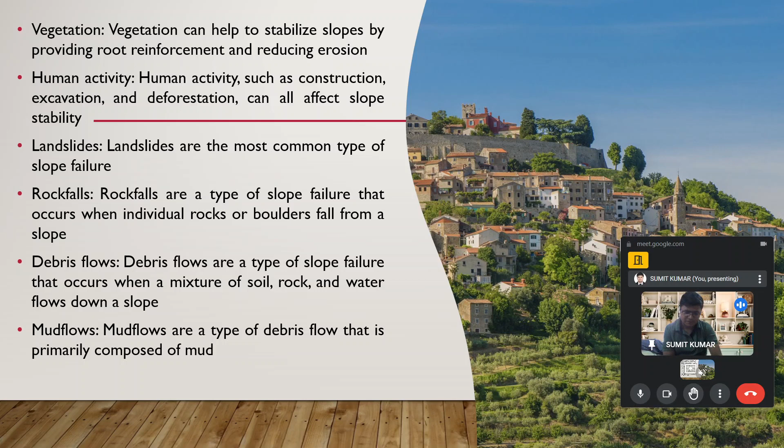Now, some methods used for stability analysis of slopes. First is the limit equilibrium method, which is the most common type of slope stability analysis method. In this method, we try to find the limiting force at which the failure of the slope takes place.

Talking about the finite element method, this is a more sophisticated type of slope stability analysis. In this method, software like Slope/W or other recent commercial softwares are used, in which the slopes are designed and then it's seen that by applying a certain amount of force, what type of failure takes place. In the finite element method, the slopes under study are discretized into small sections, which are studied separately. The analysis is run, and we reach a specific outcome: up to this much force the slope is stable, after which it leads to failure. Finite element analysis is one of the most promising techniques in the present day world, and it has been used widely. It basically replicates the true sense of the slopes which are present there.

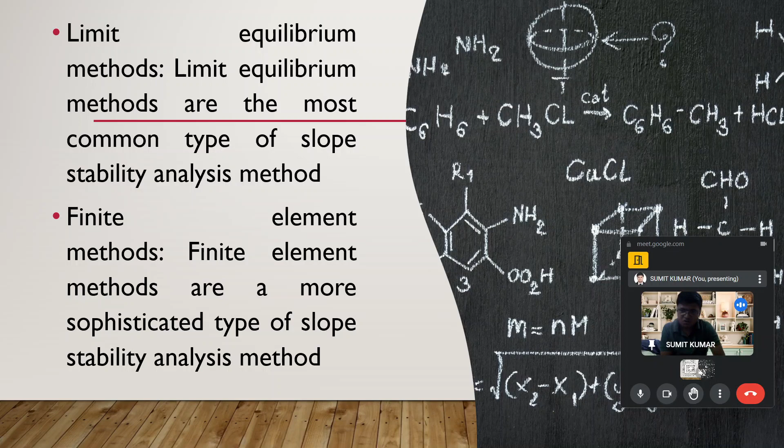Now talking about drainage, as mentioned earlier, drainage is one of the problems.

The drainage can help improve slope stability by reducing the amount of water in the slopes. It needs to be understood that if the drainage is sufficient, then the water, which is a problem for the soil, will not create the problem to a full extent and can reduce the damage at those specific locations.

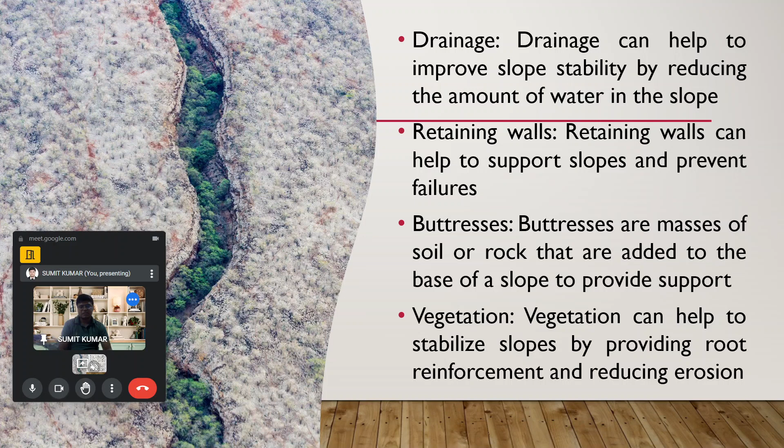Now talking about the retaining wall. Retaining walls can help support the slopes and prevent failures. Buttresses are masses of soil or rock added to the base of the slope to provide support, and they sometimes also act as support to reduce the chances of failure of the slope.

We have discussed vegetation. From vegetation, we concluded that removal of vegetation can disturb the slope in the downward direction and may ultimately lead to damage or instability within the slopes, because one of the prime concerns regarding vegetation is deforestation, which is the primary human-induced reason leading to the failure of slopes.

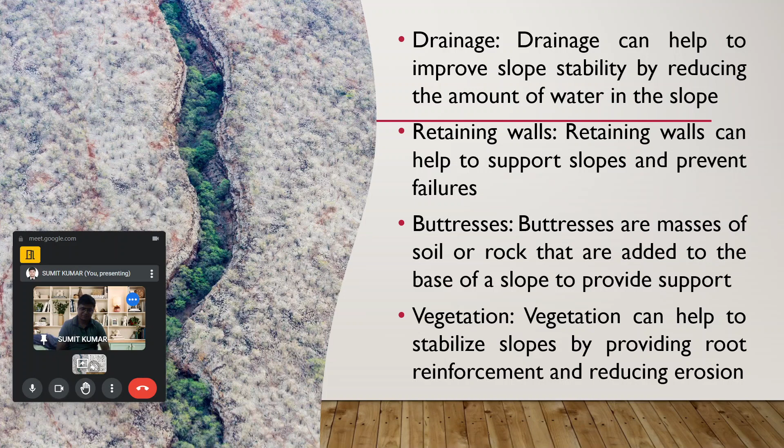We have discussed slope geometry. The shape, size, and angle of the slope are equally important for our understanding, because if the slope geometry is not taken care of and understood, it may lead to problems related to these facts.

Now talking about groundwater. Slope geometry, soils, and rock properties have been clearly mentioned in the previous slides. But understanding groundwater is one of the major concerns, because the presence of groundwater could affect the effective stress parameter and lead to problems associated with those locations.

Talking about vegetation, vegetation growth reduces the chances of erosion in those regions and stabilizes the slope in itself in a way. So the presence of vegetation is also one of the good factors we understood.

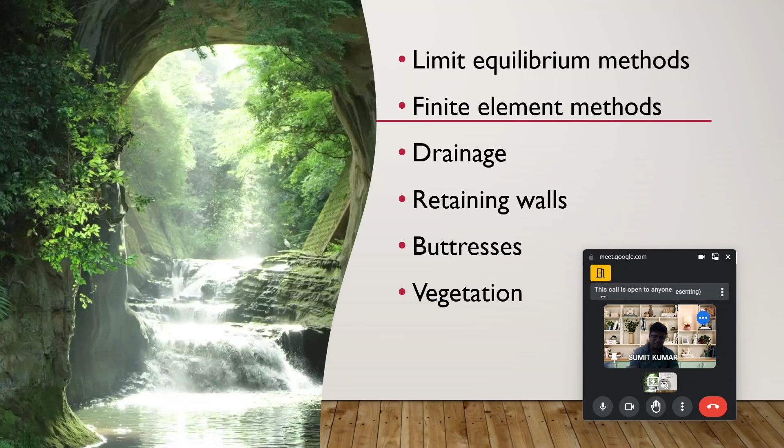The drainage conditions, retaining walls, and buttresses which provide support at that section, and vegetation, and how vegetation could help -- these points we have gone across in a very elaborate way to develop our understanding.

Now we move to the stability of slopes. Here we will check some of the other concerned practical examples which could give broader aspects to our understanding.

Now talking about the stability of slopes. First, the slope definition: we understood very clearly that the slope is that section which may be finite or infinite, present specifically in hilly areas. A large sloping region could also give a balance in a way, but if the slope is not very large, not an infinite slope but a finite slope, the analysis takes place in a different manner. We have discussed about that.

Going forward, we will discuss the methodology as well, how to find the factor of safety, and if we want to achieve a certain factor of safety, how much depth should be there. We will discuss those points, perhaps with the help of some questions, to reach those objective concerns and give a concluding remark regarding the same.

Now, the types of slope we have understood earlier as well. The cause of failure of slope may be natural or man-made. Talking about natural causes, these include failures of slope due to instability, due to seismic effects, or sometimes due to erosion or heavy rainfall, which lead to weakness of soil at those specific locations.

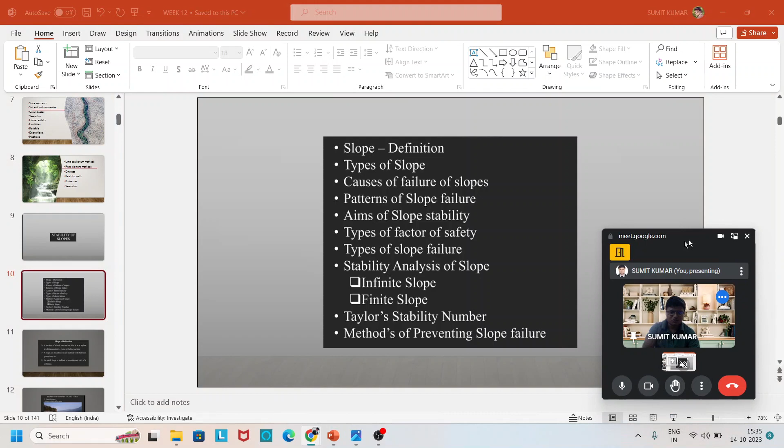Talking about the aim of slope stability, the primary aim is to give safety to the people residing there, or using those locations for day-to-day activity, or for transportation purposes. It needs to be clearly understood that the large economical damage as well as the damage of life, which leads to serious concern, needs to be eradicated. So the primary aim is to reduce those losses.

Talking about the factors, the type of factors of safety. The factor of safety is a study in which one will clearly mention the facts related to failures, and how the eradication of failures could be achieved.

Now talking about stability analysis in slope. There is an infinite slope and a finite slope. Infinite slope is of larger length as compared to finite slope. In infinite slope, we take the analysis at specific sections and then develop our result in finite slope. The finite slope doesn't mean it has a very less or large inclination; this is not associated with the facts related to infinite and finite slope. So in finite slope, we first go through the infinite slope to develop our understanding, and afterward we move to the finite slope.

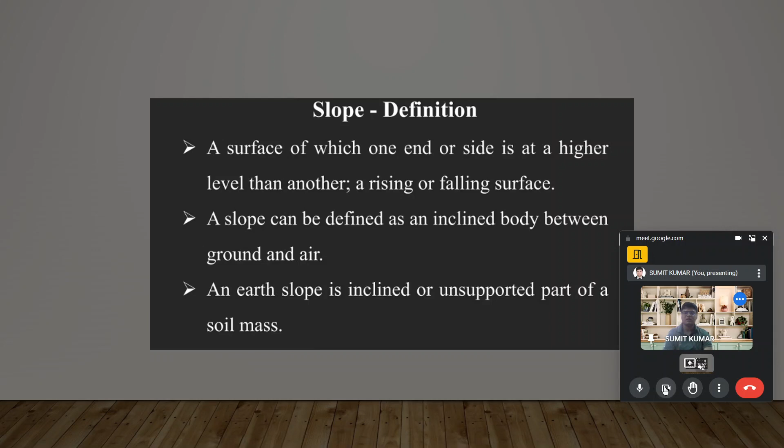Now, moving forward, the slopes on the earth are of two types. One is the natural slope, that exists in the hilly area, and another is the type which has been constructed due to human activity, or which has been manually created. So these factors need to be understood.

Talking about man-made slopes, when we see the natural slopes present above the mountain region, those slopes are natural slopes which have existed there for a long period of time. But when we talk about slopes created by humans, that is of concern: the sides of cutting and filling. The side of cutting is a man-made slope. The slope of the embankment constructed for roads, railway lines, canals, etc. are man-made slopes. The slope of earth dams constructed for storing water is also a man-made slope.

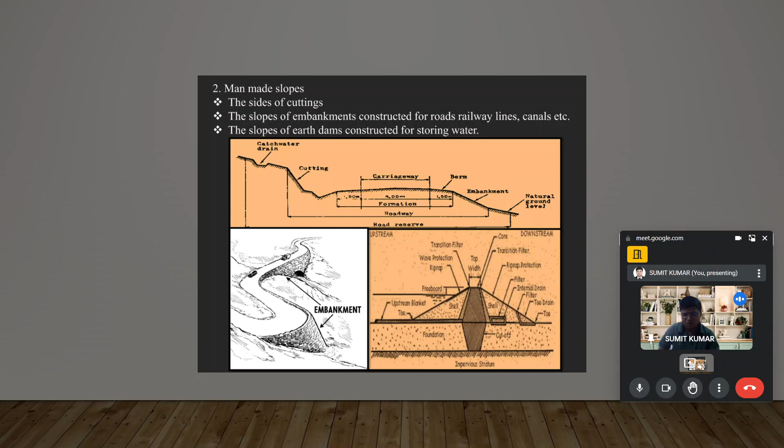Now, when we move forward, we will define and get an understanding of infinite and finite slopes. There must be some difference between them, so this understanding needs to be developed. We will identify these types of slopes because the analysis of infinite slope and finite slope takes place differently. The term infinite slope designates a constant slope of infinite extent, going from one point to another over a very long distance. The long slope of the face of a mountain is one example of an infinite slope.

Now talking about the finite slope. Finite slopes are of limited extent. The slope of an embankment and earth dams are examples of finite slope, because their length is not too big. So this gives the prime understanding about infinite and finite slopes.

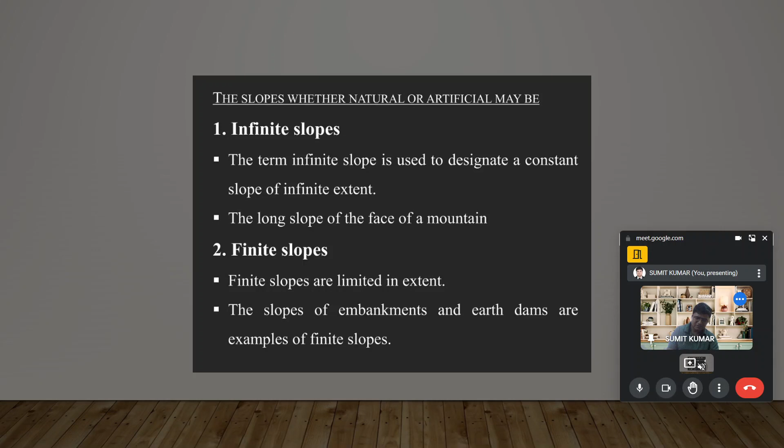Now come to the next point: the causes of failure of slopes. Some of the important causes are, first of all, the gravitational force; force due to seepage of water; erosion of the surface of slope due to flowing water; the sudden lowering of water adjacent to the slope; and forces due to earthquake. These are some of the reasons which lead to the failure of slopes.

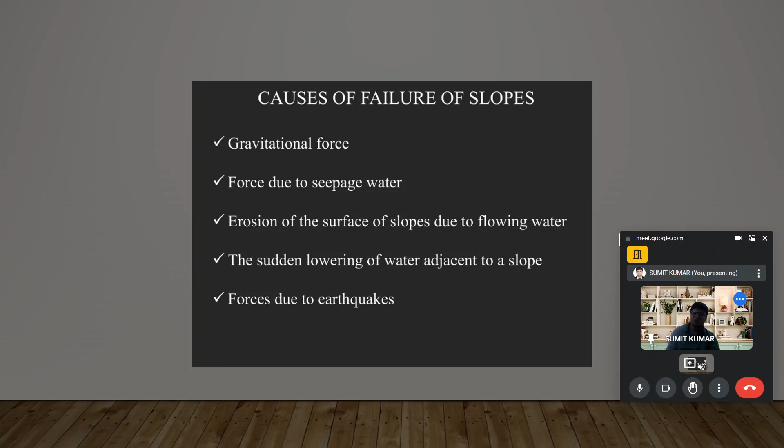Now, we have discussed the reasons behind the failure of slopes. So now we will move and see the pattern of slope failure. From the diagram, you can see that rotational landslides could take place, translational landslides could be there, block slides could be there, and rock fall has also been presented. Topple, debris flow, debris avalanche, and earth flow are some of the things shown here in this pattern diagram, showing the different patterns in which failures of slopes actually take place in the field.

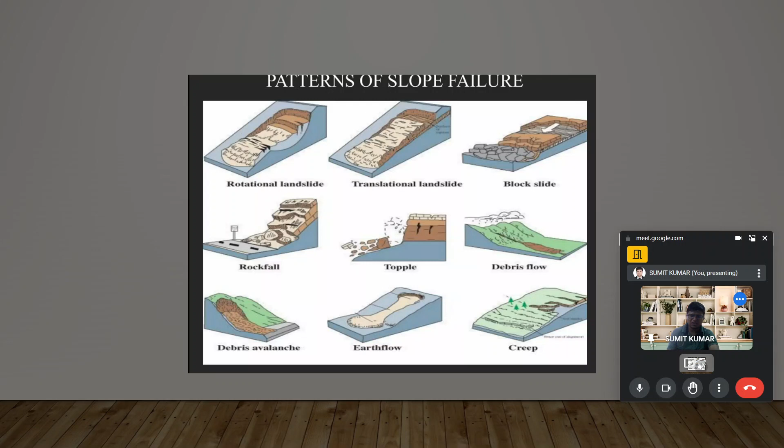Now we will see the aim of slope stability. We have come across these pointers again and again in different language, so we develop our understanding and try to avoid instability across the slope. For this, we need to assess the stability of slope under short term, often during construction, and long term conditions.

To assess the possibility of landslide involving natural or existing engineering slopes, to analyze the landslides and understand the failure mechanism and the influence of environmental factors, to enable the redesign of the failed slopes, and the planning and design of preventive and remedial measures, where necessary to study the effect of seismic loading on slopes and embankments, are some of the primary aims behind the study of stability analysis of slope.

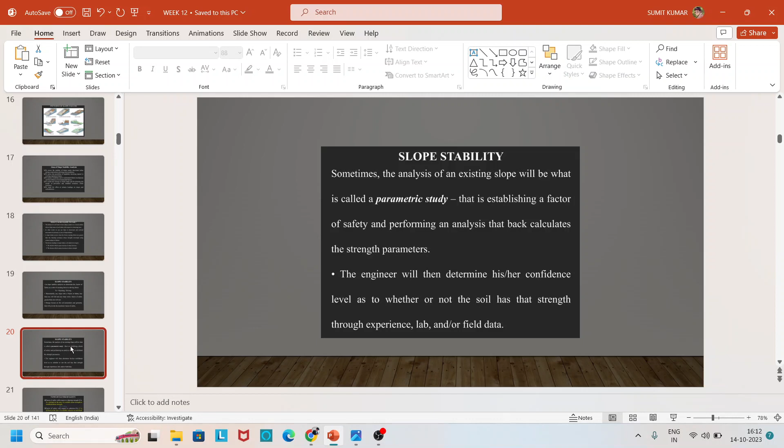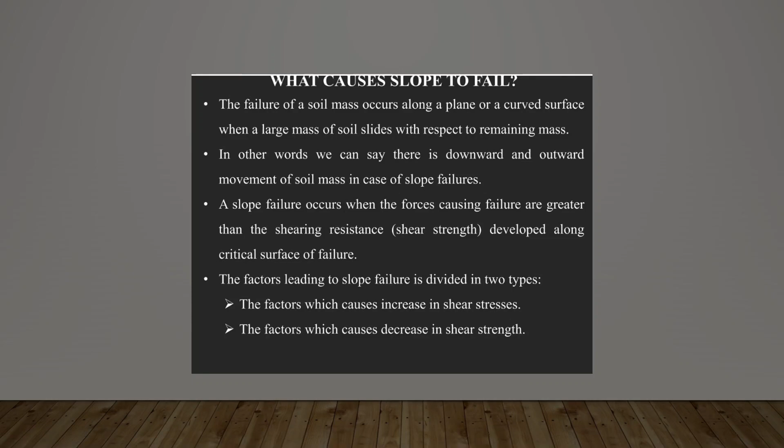The slides are visible on the screen, so I will start from here and move forward. We will try to sort out all the concepts. The main concern is to present the concept to you, and if I am able to do so in the remaining time, there is no problem. If more time is required, I will take the time over here only. Also, one more class is there on the coming Wednesday, so not to worry regarding anything.

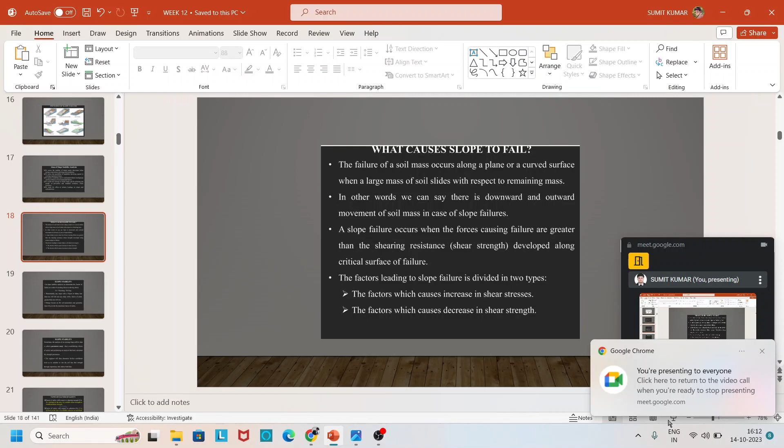Okay, so we are talking about the causes of slope failure. The failure of soil mass occurs along a plane or a curved surface when a large mass of soil slides with respect to the remaining mass.

In other words, we can say that there is a downward and outward movement of soil mass in case of slope failure. So when we came across those points, we understand that a slope failure occurs when the forces causing the failure are greater than the shearing resistance, that is the shear strength. I think the points are very much clear up to date.

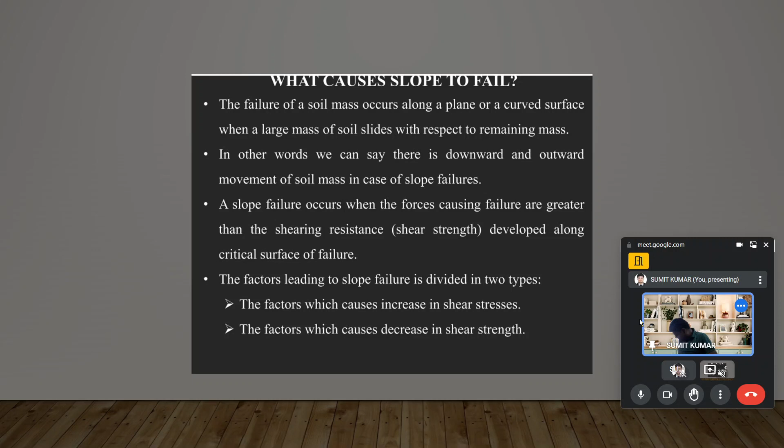The network is a little bit unstable, that's why I'm trying to set up those things forward and backward. No problem. So the failure of soil mass occurs along a plane or a curved surface when a large mass of soil slides with respect to the remaining mass. In other words, there is a downward and outward movement of soil mass in case of a slope failure. A slope failure occurs when the forces causing the failure are greater than the shear resistance, that is the shear strength developed along the critical surface.

Talking about the factors that lead to slope failure, it is divided into two types: the factors which cause an increase in the shear stresses, and the factors which cause a decrease in the shear strength. Now, talking about the factors which contribute to the shear strength, like the strength associated with factors such as vegetation.

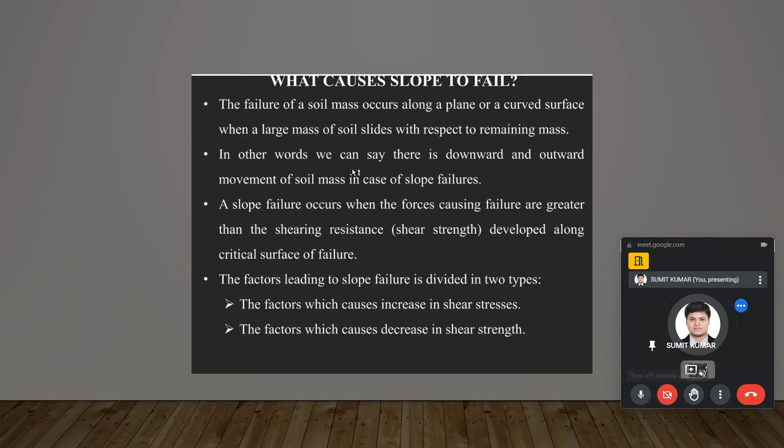Okay, so now we will move to the next part. The coming part is talking about slope stability. From the start we are talking about slope stability, and we started with a definition. Now we are concerned about slope stability analysis, what we are trying to determine. In slope stability analysis, we are trying to determine the factor of safety, and what do we want with this factor of safety?

Okay, there is again a problem, network error taking place. This is the problem associated with network issues arising today. What is the reason behind this? I am not getting it at this point, but let's see what we can do to sort out the problem. Let me try to regain the network and rejoin so that I can explain the concepts. It has been setting up, I will try to rejoin. I think the network has been restored. So am I clearly audible? I need to share my presentation again. There is a problem of network today. Maybe many more people are consuming internet services because there is a much awaited cricket match going on today between India and Pakistan, so the load on telecom operators is too high, leading to the network issue. Otherwise, from the last 11 weeks we have gone through this course, never has a network issue arisen, but today it has been observed, so maybe that's the reason. I think many of you are also enjoying that match.

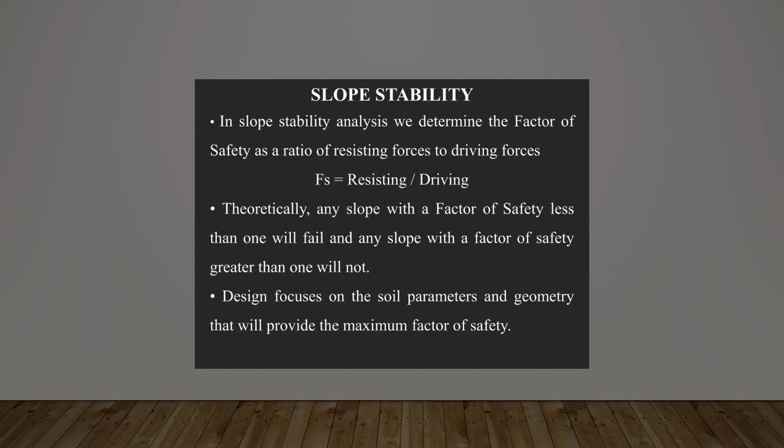Okay, let's see, we are talking about slope stability. So in slope stability analysis, we determine the factor of safety as the ratio of resisting force to the driving force. Factor of safety is calculated on that basis only, how the resisting force and the acting force is going to act, so we will see those concepts over here.

Okay, so whether my presentation is visible, I think it is not visible on the screen very clearly, but I will try to sort it out.

Okay, no problem. We are talking about slope stability. In slope stability analysis, we determine the factor of safety as a ratio of resisting force to the driving force. The factor of safety is resisting force by driving force. Theoretically, any slope with a factor of safety less than 1 will fail, and any slope with a factor of safety greater than 1 will not. So it should be very much clear in your mind that factor of safety is associated with the concern point, how much resistance one can offer.

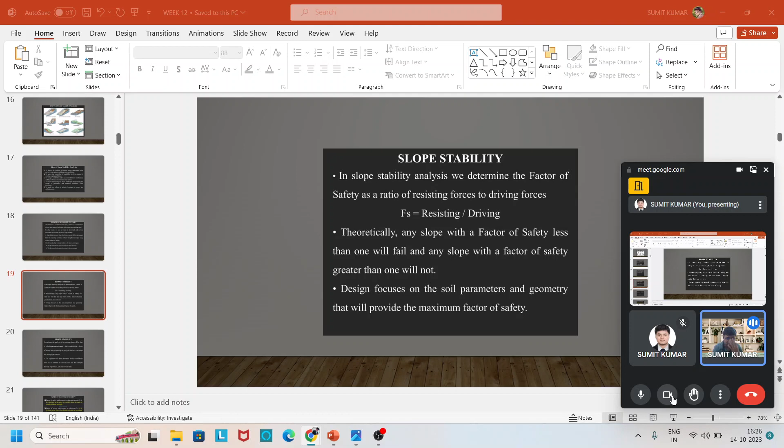So I am talking about slope stability. In slope stability analysis, we determine the factor of safety as a ratio. I have taught this earlier as well, but I don't know whether the network was there at that time, so I will take this again for better understanding. Theoretically, any slope with a factor of safety less than 1 will fail, and any slope with factor of safety greater than 1 will not. So the design focuses on the soil parameters and geometry that will provide the maximum factor of safety.

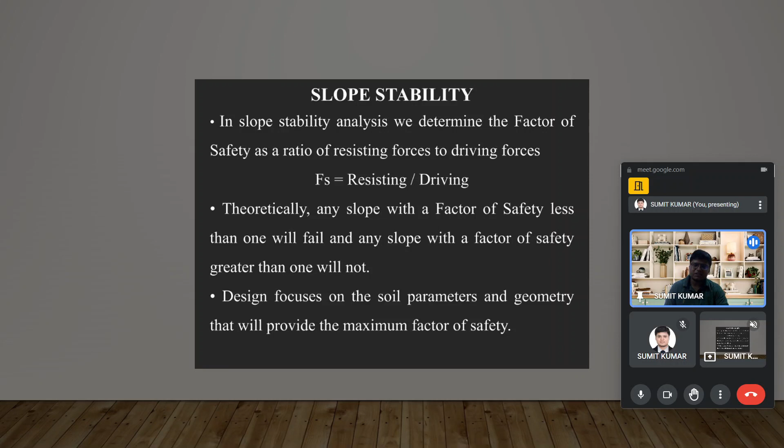Over here we are talking about the designs that will be focused in our study. Sometimes the analysis of an existing slope is called a parametric study. In that study, we try to establish a factor of safety and perform an analysis that back-calculates the strength parameter, and by calculating the factor of safety we try to reach the outcome in which we suggest the solution of the problem. The engineer will then determine his or her confidence level as to whether or not the soil has that strength, through experience, lab, and or field data.

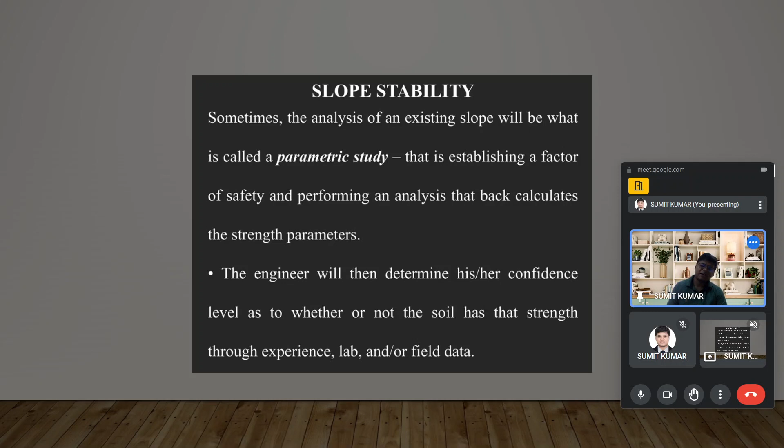Talking about the types of factor of safety: the factor of safety with respect to shear strength is defined as the ratio of available shear strength to mobilized shear strength, represented as Fs equal to tau by tau m, where tau m is the mobilized shear strength and tau is the available shear strength.

The factor of safety with respect to cohesion is known as Fc, defined as the ratio of available cohesion to mobilized cohesion, denoted as Fc equal to C by Cm, where C is the available cohesion and Cm is the mobilized cohesion.

Talking about the factor of safety with respect to friction angle, F phi, it is again defined in the same terms as the ratio of available friction to mobilized friction, as F phi equal to phi by phi m, where phi is the available friction and phi m is the mobilized friction. So we interrelate these terms to provide a factor of safety at a specific location.

Now we talk about the types of slope failure. Slope failure takes place in different forms like slope failure, toe failure, and base failure. In base failure, the failure takes place from the base because the soil at the toe and at the face is stronger compared to the soil at the base, so the failure takes place from the base only.

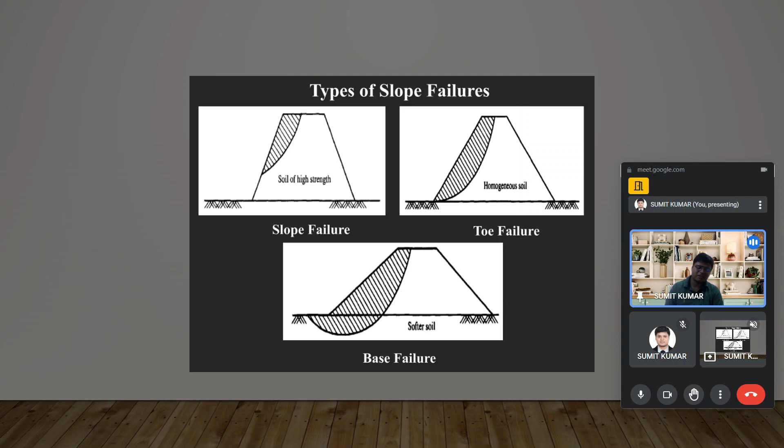Similarly, in toe failure, the soil at the base and face are stronger compared to the soil at the toe, so failure takes place from the toe, and this is called toe failure. Similarly, slope failure has been represented in the same regard, where the strength of soil differs at different positions, leading to these different failures.

Now talk about some assumptions made in the analysis. The stress system is assumed to be two-dimensional, and strain in the third direction is taken as zero. This is done to make our understanding and calculation easy compared to a full three-dimensional treatment.

We already know from our understanding of shear strength that we perform similar applications. In this regard, we try to convert the 3D problem into a 2D problem for better analytical calculation, so we can reach a more generalized outcome, because if the equation is developed in 3D it becomes trickier to solve. These factors have been considered.

Now it is assumed that the Coulomb equation is used for determining the shear strength, as S equal to C plus sigma tan phi.

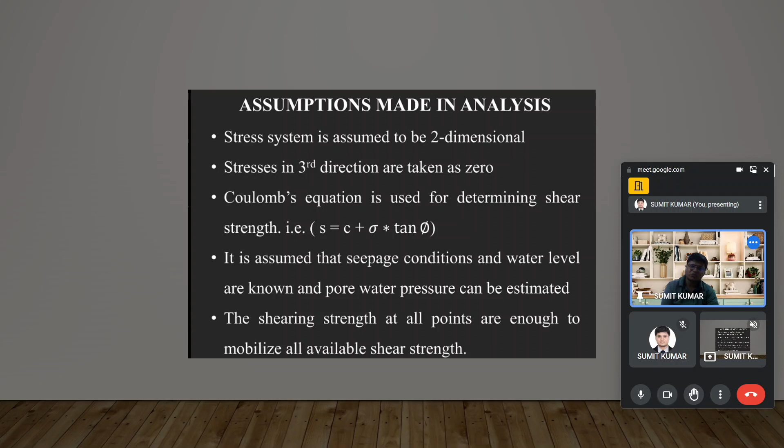Now it is assumed that the seepage conditions and the water level are known, and the pore water pressure can be estimated, so the shear strength at all points is enough to mobilize all available shear strength. Moving ahead to the stability analysis of infinite slopes in different types of soil, first talking about cohesionless soil.

For the dry state, the factor of safety of the infinite slope for the dry state may be written as Fs equals tan phi by tan I. Similarly, for the submerged state, the factor of safety of the infinite slope has been shown as...

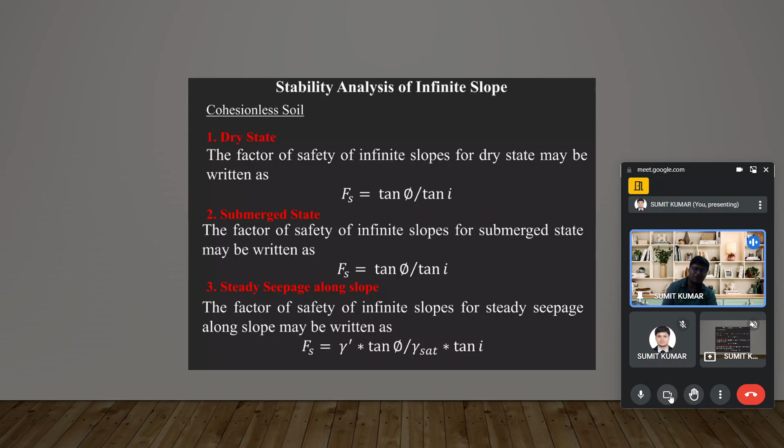In this case, gamma dash by gamma sat is approximately 1 by 2, so sometimes 1 by 2 tan phi by tan I is also stated in several textbooks or conceptual notes. That's not a problem because when considering 9.81, it's not exactly half, but in some cases it is approximately half. Those considerations are taken care of at different locations, at different places.

Now talking about, as we discussed for cohesionless soil, when we talk about cohesive soil, Fs is modified and becomes Fs equals C by gamma cos I sin I into H. And the factor of safety when we calculate for the infinite slope in the submerged condition for purely cohesive soil is given as C by gamma dash into cos I sin I into H.

Similarly, moving to steady seepage along the slope, the factor of safety for the infinite slope when steady seepage takes place is C by gamma sat, because the steady seepage takes place along the fully saturated state, so C by gamma sat into cos I sin I into H. I think up to this there will be no confusion.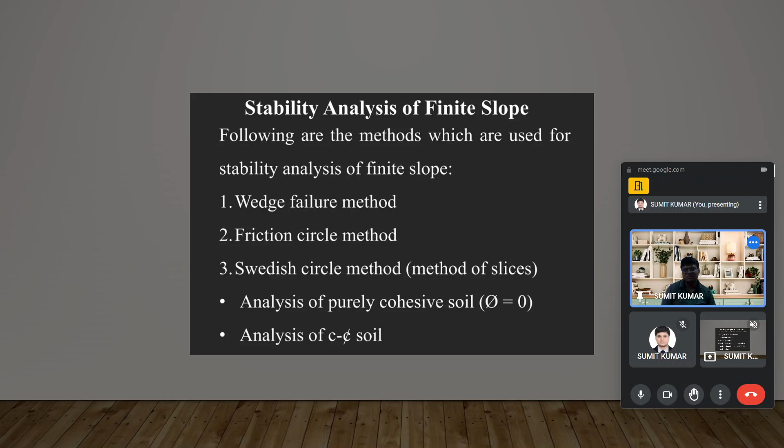Now we talk about the stability analysis for the finite slope. In finite slopes, some of the important methods which have been implemented are the wedge failure method, friction circle method, Swedish circle method, and the method of slices. After that, the analysis of purely cohesive soil as phi equal to 0 and analysis of C-phi soil both take place under the Swedish circle method. So we will go one by one.

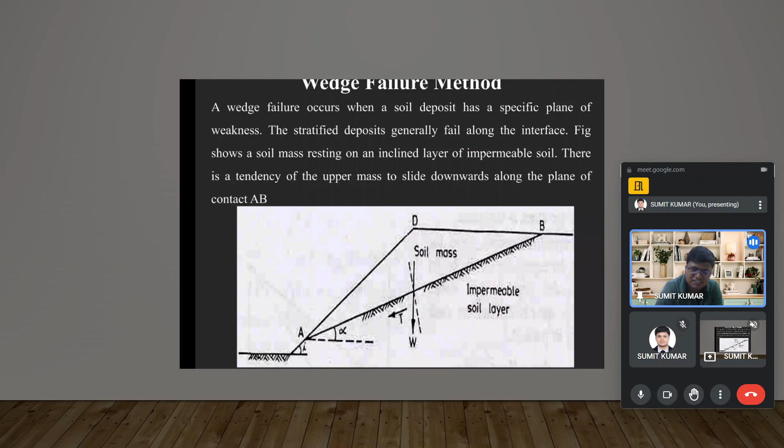First of all, see the wedge failure phenomenon or the wedge failure method. A wedge failure occurs when the soil deposit has a specific plane of weakness, and the stratified deposits generally fail along the interface. The following figure shows a soil mass resting on an inclined layer of impermeable soil. There is a tendency of the upper mass to slide downward along the plane. The contact AB has been represented here, showing the soil mass above and the impermeable soil layer below, and how the angle has been made.

Discussing this, the force trying to cause sliding is the tangential component of the weight W along the plane of contact, that is T equal to W sine alpha, where alpha is the angle between the plane AB and the horizontal. The force tending to resist the sliding depends upon the cohesion C, and the frictional force is given by S equal to C L plus W cos alpha into tan phi, where L is the length of the failure surface. The factor of safety is given by F equal to C into L plus W into cos alpha into tan phi, divided by W sin alpha.

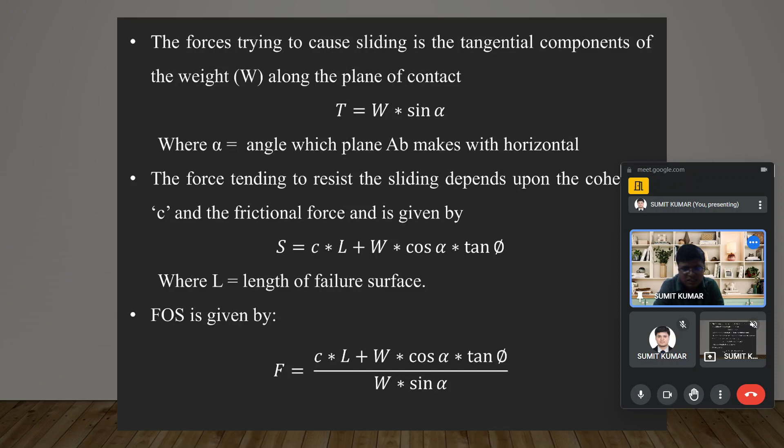Talking about the friction circle method, it is based on the fact that the resultant reaction between the two parts of soil mass into which the trial circle divides the slope will be tangential to the concentric smaller circle of radius r sine phi. This is also one of the questions which has been asked many times in some of the reputed examinations - that r sine phi is the radius of the friction circle method.

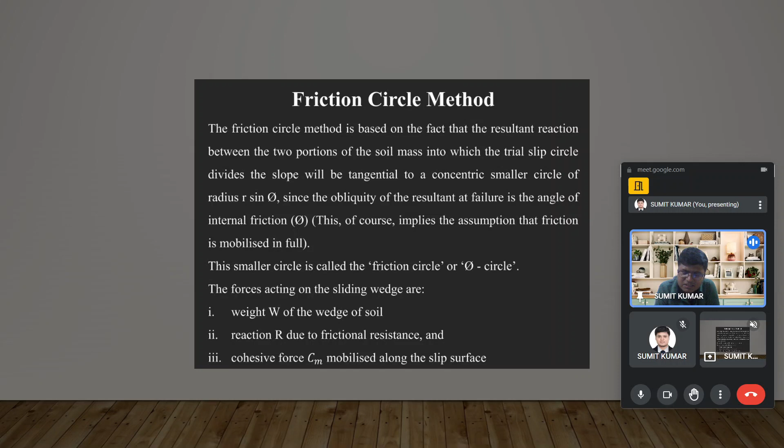Since the obliquity of the resultant at failure is the angle of internal friction phi, this implies the assumption that friction is mobilized in full. The smaller circle is called the friction circle or the phi circle, and the forces acting on the sliding wedge are the weight W of the wedge of soil and the reaction R due to the frictional resistance, and the cohesive force Cm, which is the mobilized cohesion of the slip circle.

So we will move forward. When we see the friction circle method, the following procedure is adopted for finding the factor of safety with the friction circle method.

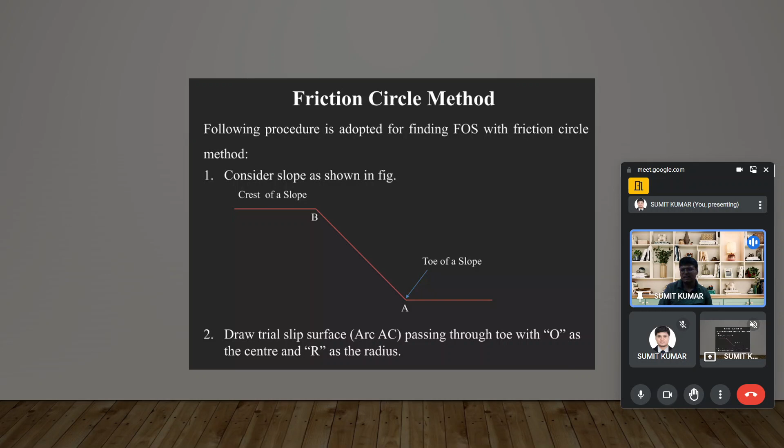Considering the slope as shown in the figure, the crest and toe of the slope have been shown as points B and A respectively. Now draw a trial slip surface as arc AC passing through, with O as the center and R as the radius, as represented here. The radius r of the circle and the center have been shown, theta is the angle, the slope has been shown, the toe and crest represented as points A and B, and the trial slip circle surface has been shown.

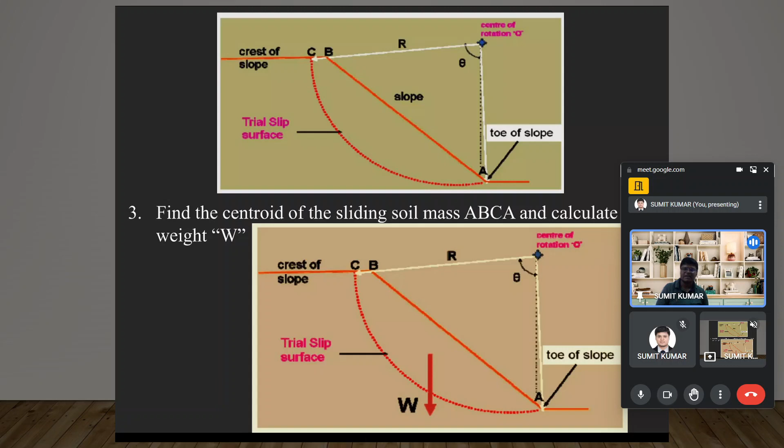Now find the centroid of the sliding soil mass ABCA and calculate the weight W. Accordingly we move forward to find the factor of safety by first drawing a triangle where W, C, and P have been represented.

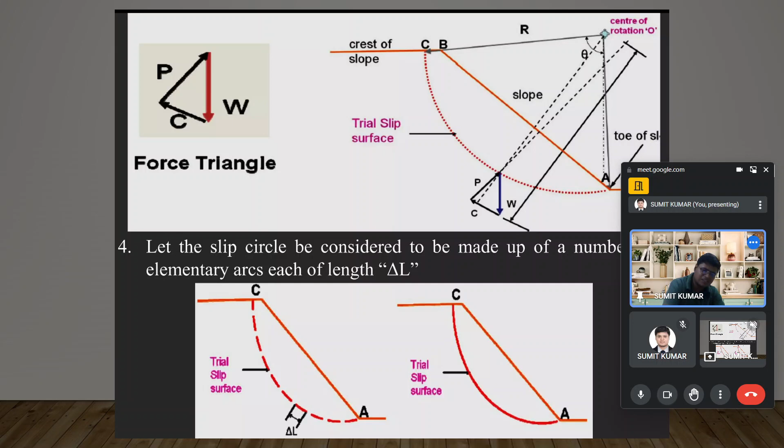Moving to step 5, we use the cohesive force acting along the element opposite to the sliding soil surface, Cm into delta L. Now the total cohesive force along the arc AC forms a force polygon. Also, the closing side AC of the polygon represents the magnitude and direction of the resultant cohesive forces.

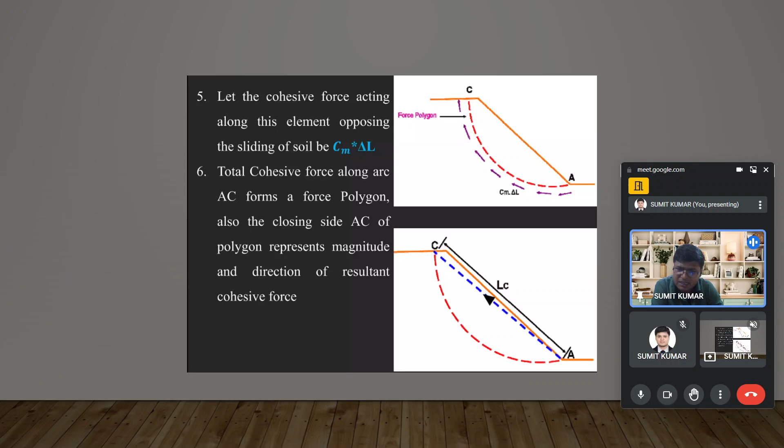Similarly solving these, ultimately we find the mobilization of frictional resistance - let P be the soil reaction opposite to the sliding soil mass as shown in the figure. The reaction due to frictional resistance P is inclined at an angle phi to the normal at the point of friction, as shown.

By knowing the magnitude and direction of W, and the direction and line of action of the other forces, the force triangle can be completed, and by measuring the magnitude of C, the factor of safety can be computed as shown.

We earlier defined the factor of safety. Here the mobilized cohesion, Cm, is equal to C by Fc. And the factor of safety with respect to cohesion is given by Fc is equal to C by Cm.

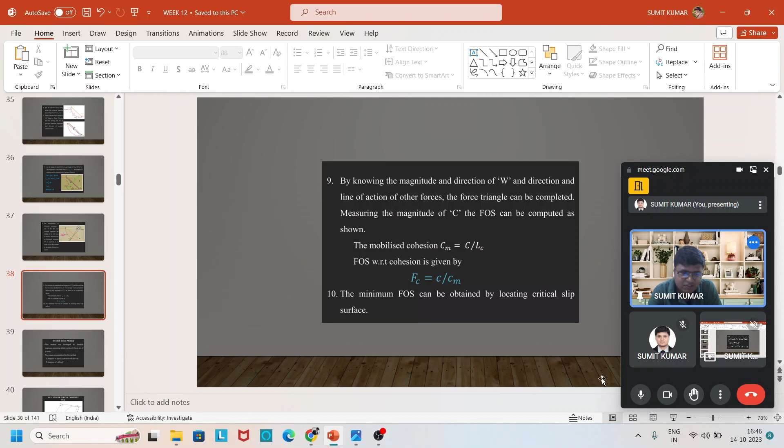The minimum factor of safety can be obtained by locating the critical slip surface, and accordingly the solution could be stated. So this should be crystal clear in everyone's mind, I think. If there's a doubt, I will rectify it with questions when we deal with them.

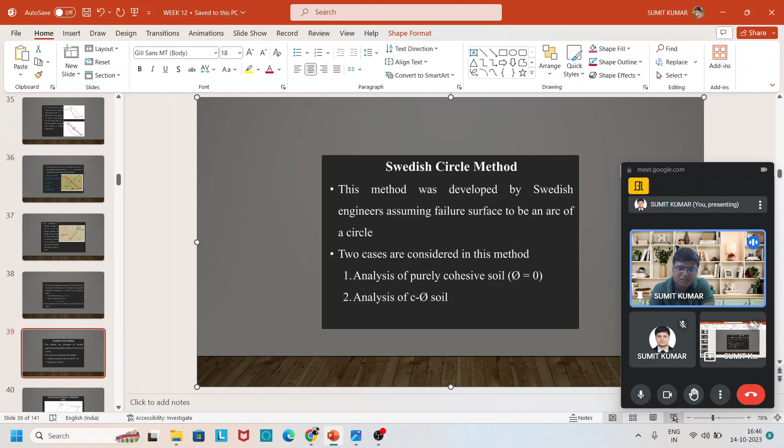Now let's talk about the Swedish circle method. This method was developed by Swedish engineers, assuming that the failure surface is the arc of a circle, and two cases have been taken, as mentioned earlier.

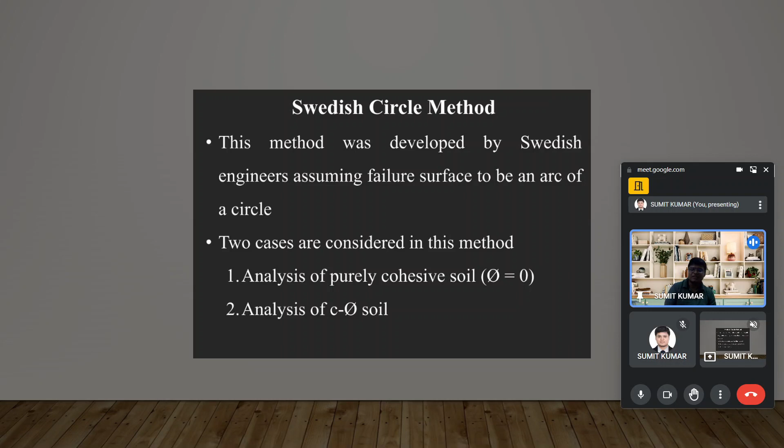The analysis of pure clay where phi is equal to 0, and the analysis of c-phi soil, in order to reach the finding. The analysis of the purely cohesive soil is shown here, where the slip surface has been represented as AB, and the weight W has been represented.

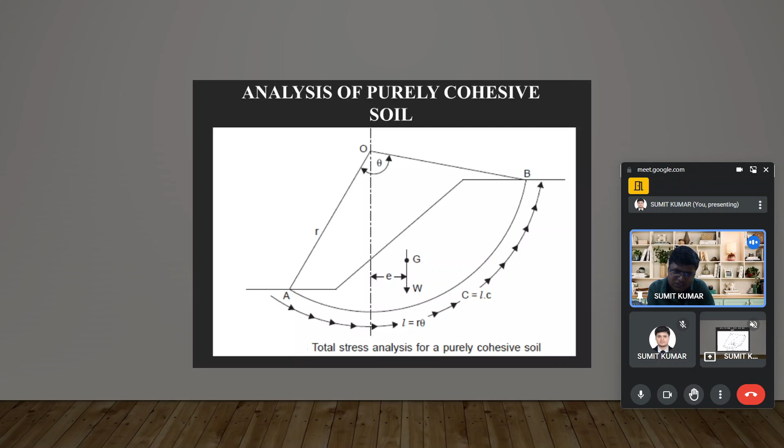The eccentricity E has been maintained, and the arc length, as already suggested, acts as L equal to R theta, where R is the radius. So L into C has been shown, and the total stress analysis of purely cohesive soil has been diagrammatically represented.

In this method, a number of trial slip circles are considered and the factor of safety for each is worked out. The circle corresponding to the minimum factor of safety is called the critical slip circle.

Let AB be a trial slip circle, with R as the radius, O as the center of rotation, W the weight of the wedge ABDA acting through the centroid, driving moment will be W into E, and let Cu be the unit cohesion and L be the length of the slip arc. AB has been represented as 2 pi R into theta by 360.

Here you will see that the shear resistance developed along the slip circle will be equal to Cu into L.

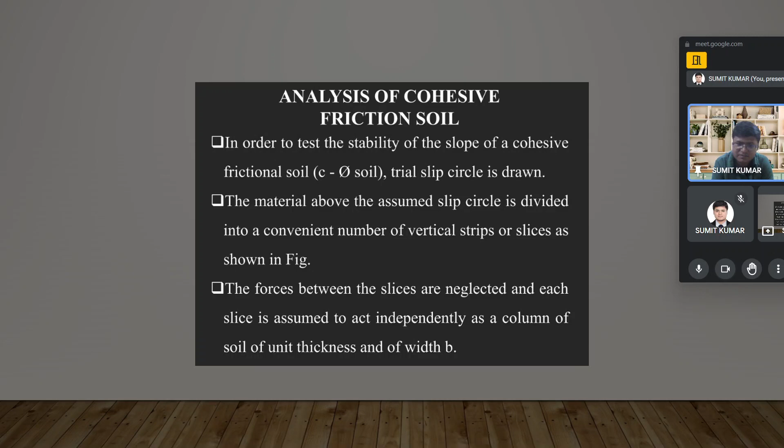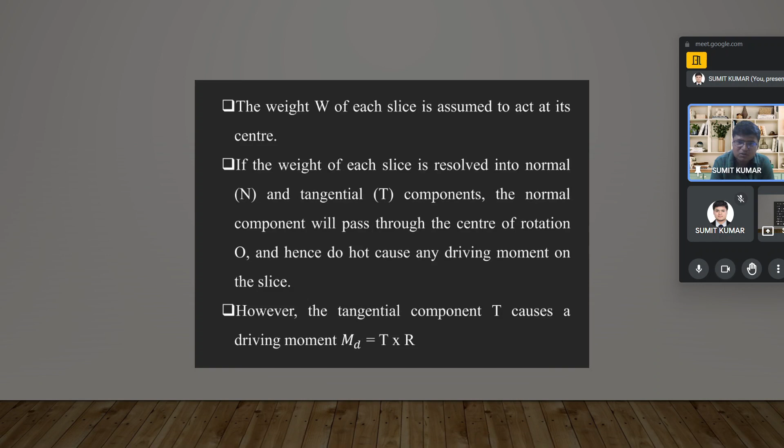Now, the weight W of each slice is assumed to act at its center - not actually, but assumed for this purpose. If the weight of each slice is resolved into the normal and tangential components, the normal component will pass through the center of rotation O and hence does not cause any driving moment on the slice.

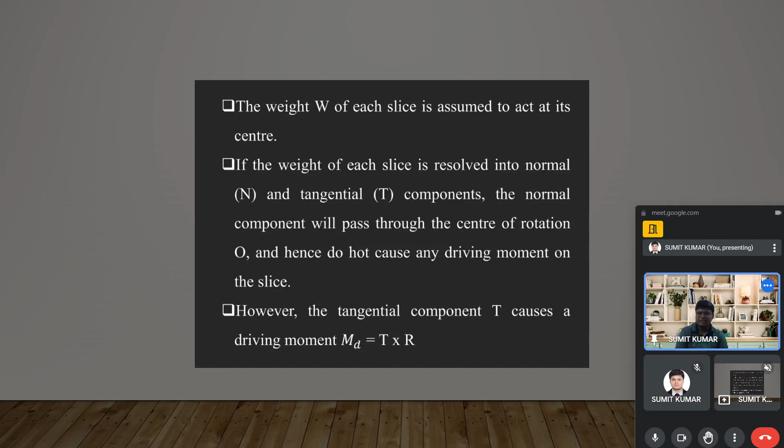However, the tangential component T causes a driving moment Md equal to T into R, where R is the radius of the slip circle. The tangential component of the few slices at the base may cause the resisting moment, in which case T is considered negative. C is the unit cohesion and delta L is the curved length of each slice.

The resisting force from the Coulomb equation is given as C into delta L plus N tan phi. A number of trial slip circles are chosen and the factor of safety of each is computed, so the slip circle which gives the minimum factor of safety is the critical slip circle.

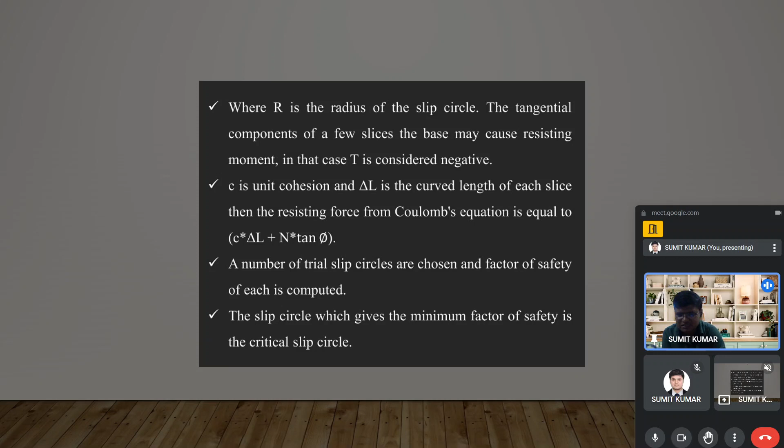For the entire slip surface AB, we have the driving moment MD as R into summation of T, and the resisting moment MR as R into C into summation of delta L plus tan phi into summation of N, where summation of T is the algebraic sum of tangential components of weights of the slices and summation of N is the algebraic sum of normal components of the weight of the slices.

The summation of L is the length of the slip circle, given as 2 pi r into theta by 360. The factor of safety is found as MR by MD, meaning the resisting moment by the driving moment. So our solution becomes C into L plus tan phi into summation of N, upon summation of T. With this, we reach the outcome and propose a factor of safety.

Talking about methods of calculating summation of N and summation of T: in method 1, the values of W, summation of N, and summation of T may be found by tabulating the values for all the slices as indicated. The slice number is put in the first column, the area is mentioned in the second column, and the weight accordingly.

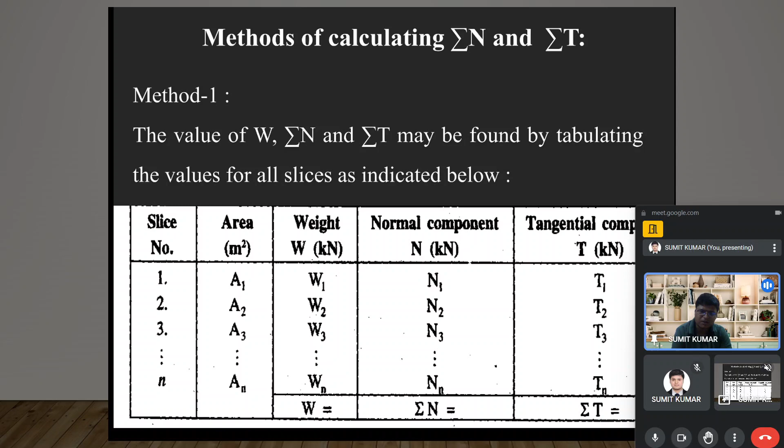After that, the normal component and tangential component are computed, after which the equation is used to reach the result.

Now, the second method suggests that summation of N and summation of T may also be obtained graphically. How? A vertical line drawn through the center of gravity of the slice, intersecting the top and bottom surface of the slice, may be assumed to represent the weight of the slice. This may be resolved graphically into the normal and tangential components.

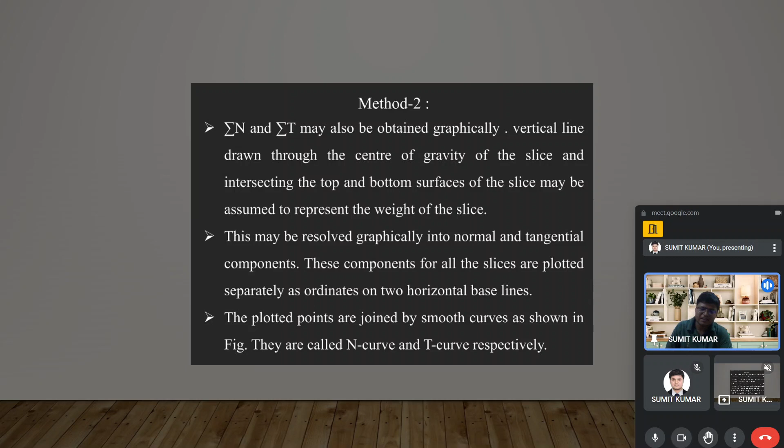These components for all the slices are plotted separately as ordinates on two horizontal baselines. The plotted points are joined by a smooth curve as shown in the figure, and they are called the N curve and the T curve respectively. The area under these curves represents the summation of N and summation of T.

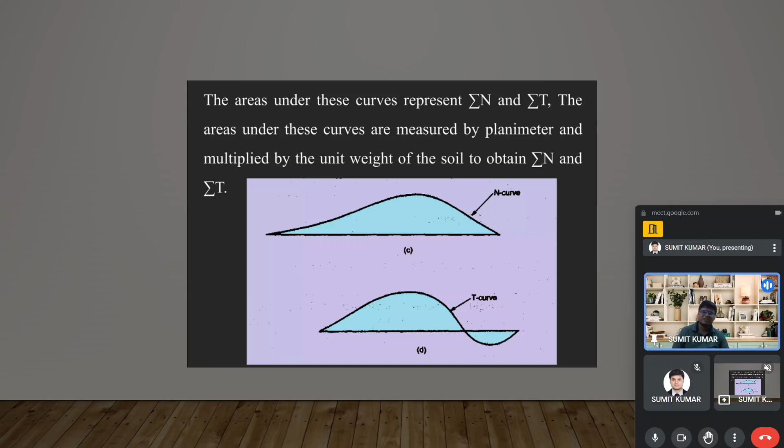The area under these curves is measured by the planimeter and multiplied by the unit weight of the soil to obtain summation of N and summation of T respectively. After that, we put these in the main equation to find the solution of the problem.

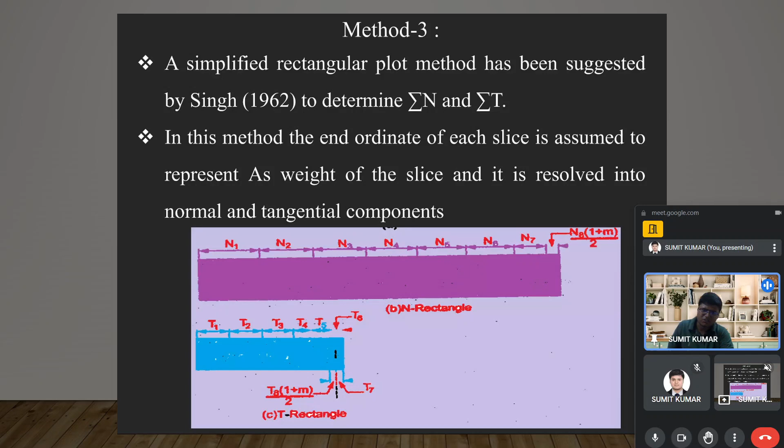In method 3, a simplified rectangular plot method has been suggested by Singh 1962 to determine summation of N and summation of T. In this method, the end ordinate of each slice is assumed to represent the weight of the slice and is resolved into the normal and tangential components. So we see N1, N2, N3, N4, and so on, and T1, T2, T3 represented, after which calculations are made to find the summation of N and summation of T.

Now let's talk about the Taylor stability number, which we studied earlier in this presentation. If the slope angle i and the height of embankment h, the effective unit weight of the material gamma, the angle of internal friction phi, and the unit cohesion c are known, the factor of safety may be determined using this interrelation.

Taylor in 1937 conceived the idea of analyzing the stability of a large number of slopes through a wide range of slope angles and angles of internal friction, and then representing the result by an abstract number which he called the stability number.

This number is designated as Sn, and Sn has been given as C by Fc into gamma h, where Fc is the factor of safety. So Sn, in other words C by Fc, has been mentioned as mobilized cohesion because we already know C by Cm as the factor, one of the Fc value factor of safety due to cohesion.

Moving ahead, when we see the Taylor stability number for the phi equal to 0 case, Taylor has also plotted some graphs, and with the help of this graph also one can reach at the specific outcomes.

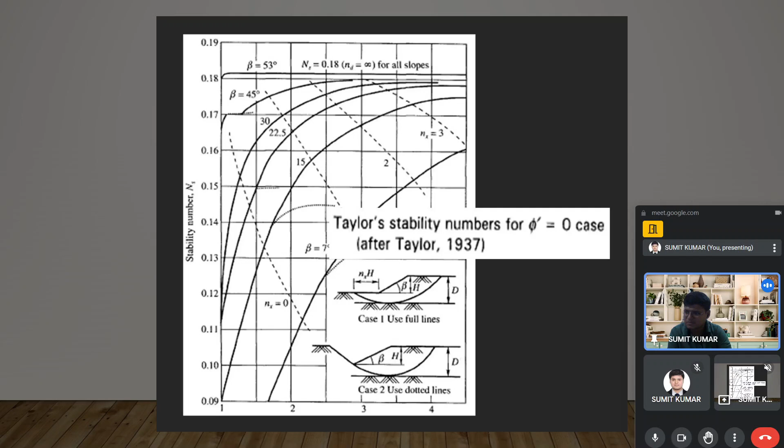Now, method of preventing the slope failure. This is talking about the methods through which slope failure could be prevented. One is vibro flotation, another one is provision of berm at toe, third one is vegetation cover.

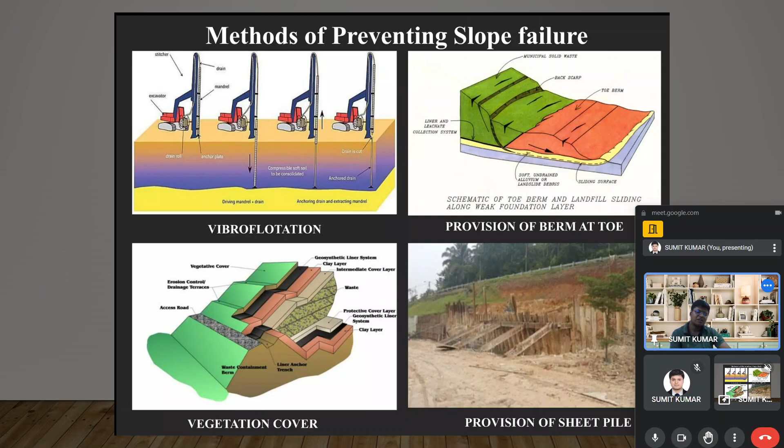It is the very essential requirement and must be required in order to also reduce the chances of reduction in the carbon footprint in one way or the other. Provision of sheet pile is one of the other factors.

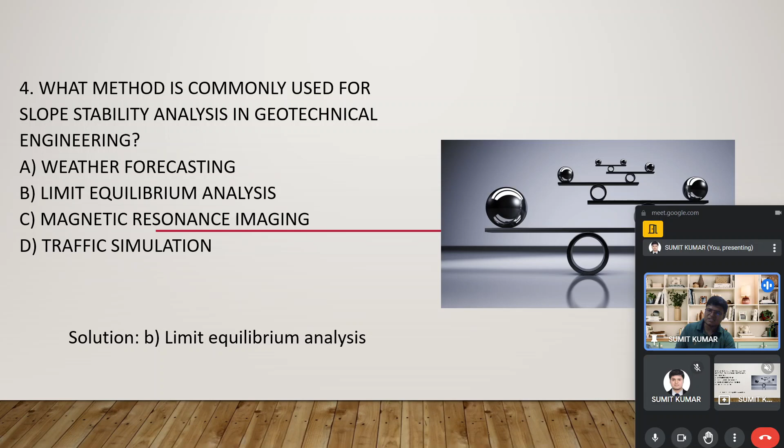The next problem: which type of slope stabilization method involves the use of structural barriers to resist the pressure of the soil behind them? Options are drainage system, soil nailing, retaining wall, grouting. The answer for this question is option C, retaining wall.

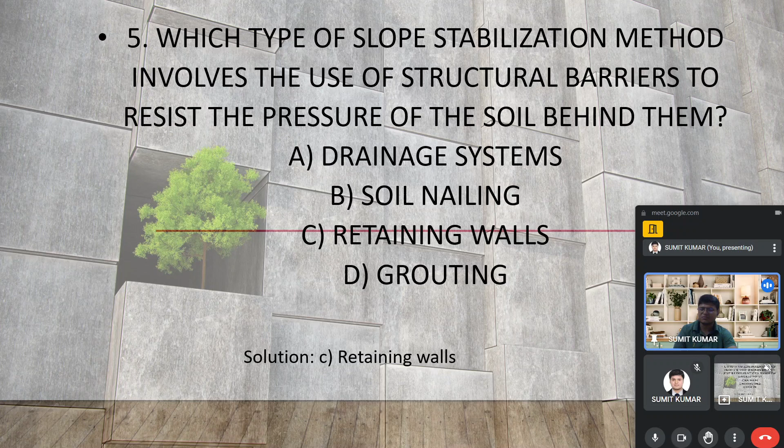Okay, clear? I think so. Now we are talking about our next factor. What is the next factor we are talking about? We are talking about the next problem.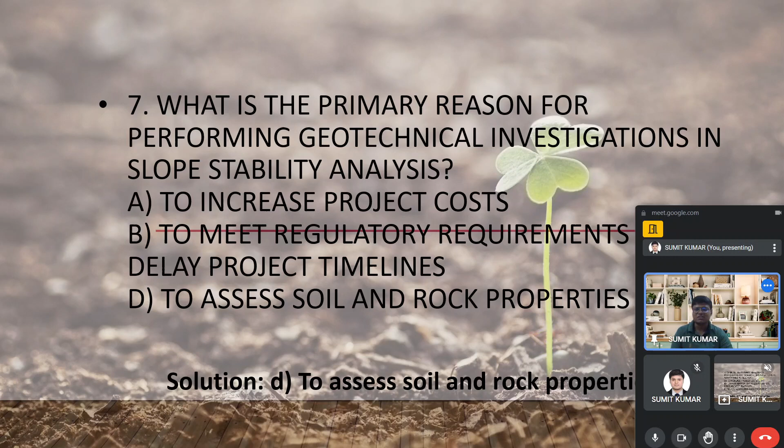The next problem: what is the primary reason for performing geotechnical investigation in slope stability analysis? Options are to increase the project's cost, to meet regulatory requirements, delay the project timelines, or to assess the soil and rock property. Option D, to assess the soil and rock property, will be the primary reason for performing geotechnical investigation in slope stability analysis.

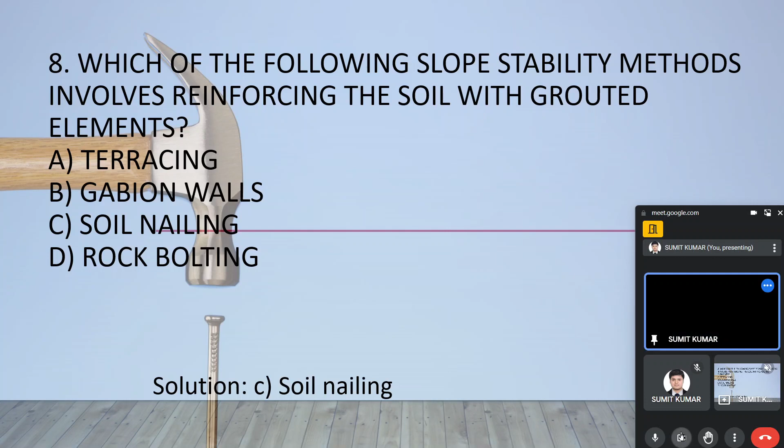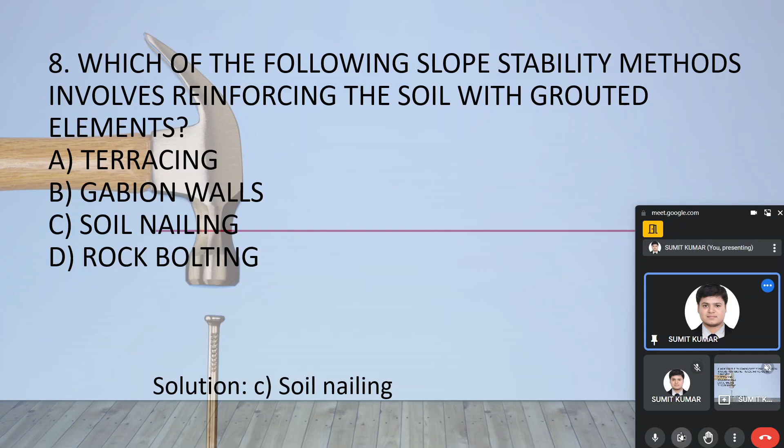I think so, everyone is okay with that. Okay. No problem. So we will move ahead for the next problem.

I will go a little faster as maybe the session gets closed automatically, and that's not what I want. So, what is the recommended approach for preventing slope instability due to heavy rainfall? Options are increasing the slope angle, implementing a proper drainage system, removing all vegetation, or adding more soil to the slope. Option B is the correct answer: implementing a proper drainage system in order to prevent slope instability during heavy rain.

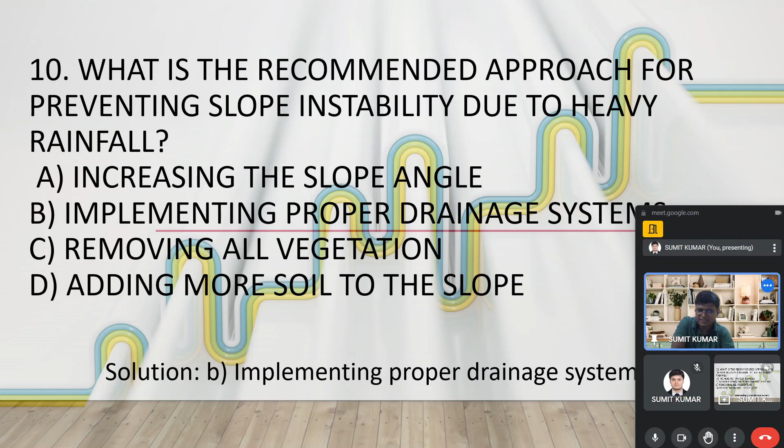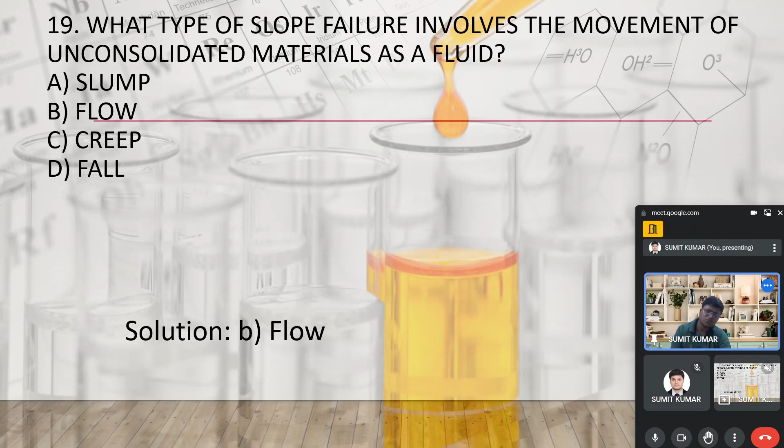Now, what type of slope failure involves the movement of unconsolidated material as a fluid? The options are slump, flow, creep, and fall. The correct answer is option B, that is flow, because it flows like a fluid.